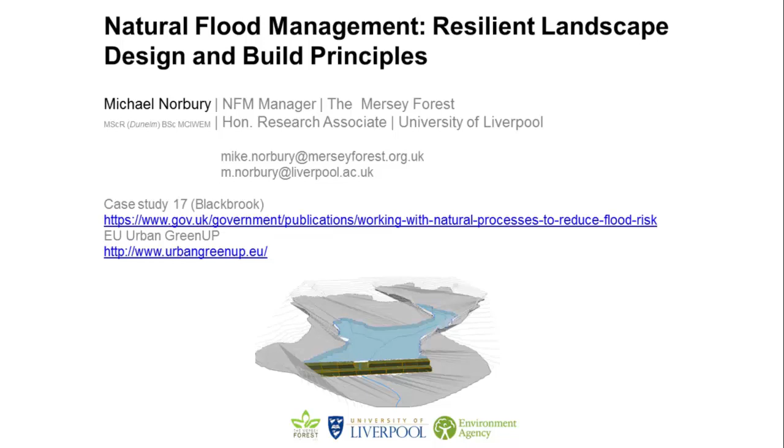Ultimately, we can't turn back the clock and abandon agricultural land and let it turn back to nature, because there's a food agenda and other agendas of a demand for housing. So it's about green infrastructure and designing attenuation into our landscape. And this is what we've been doing up in St Helens. We've been working with the Environment Agency and others, and we've built over 1 kilometre of leaky barrier over about 11 different features to slow the flow of floodwaters upstream.

For instance, this is just one leaky barrier in a pond upstream of a series of properties that flood a few hundred metres downstream. And we've put in a soil bund behind this in the next few weeks. And the idea is it just gives a bit more freeboard and a bit more storage to help those properties downstream, which, in the last event in 2015, flooded internally.

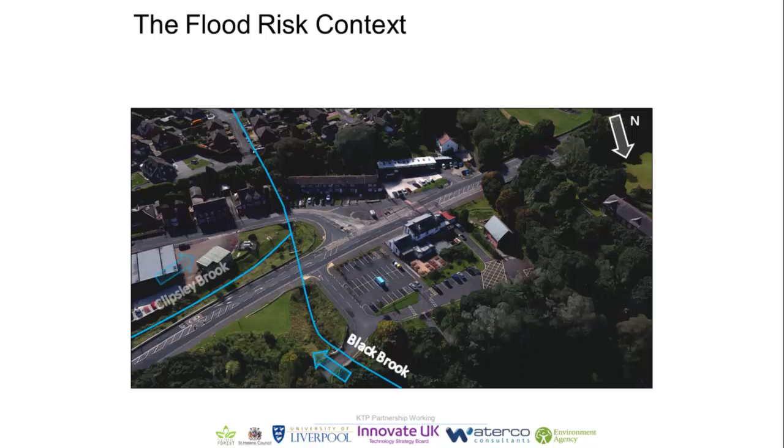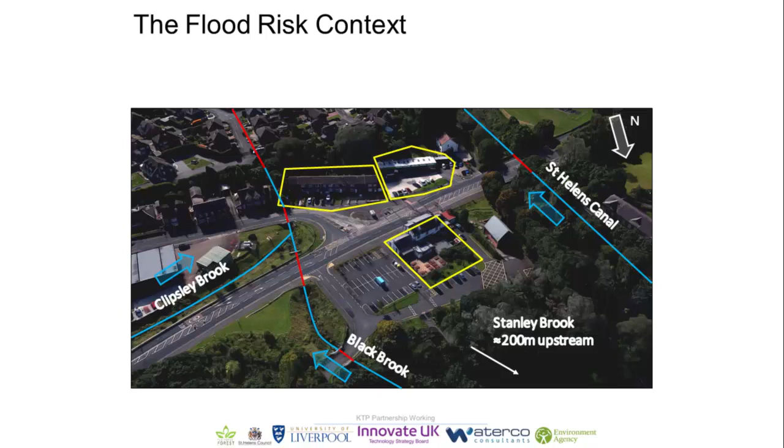So the first example is urban fringe or rural natural flood management in an area called St Helens. This is the area in question. So it's Black Brook. Black Brook is at the outlet of that 24 kilometre squared catchment, and it's at the confluence of a series of 3 rapid response catchments, which are very flashy, with that rainfall coming down to run off very quickly. And the red areas there show where those water courses are in pipes, undersized pipes or undersized bridges, which means in a high flow, high water level or flow volume, it can't actually pass through that system and out, and floods this area.

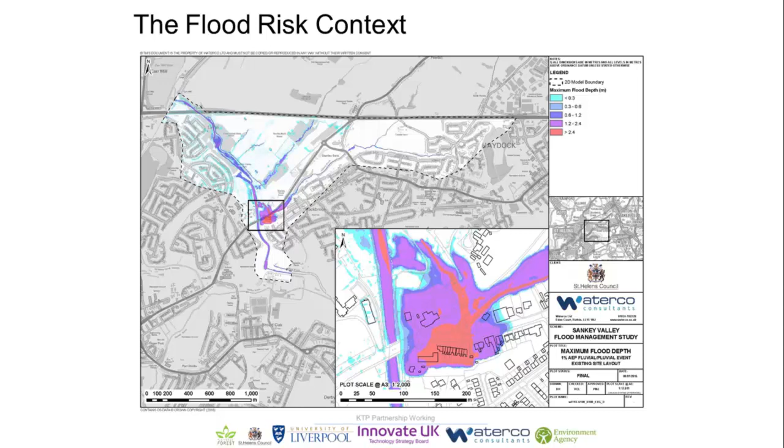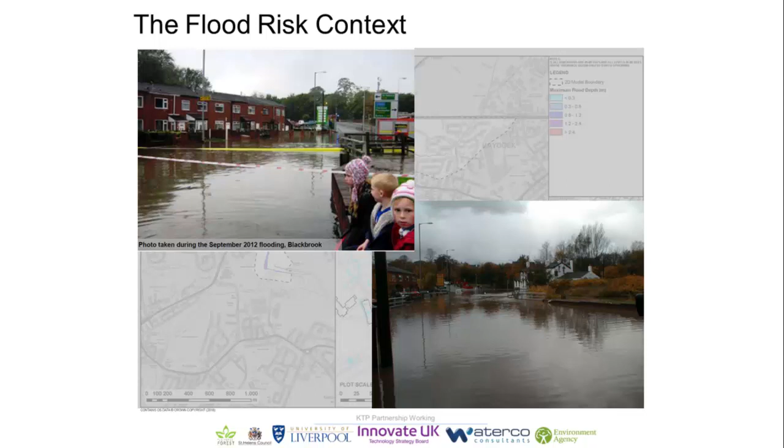So we've done some hydraulic modelling of that, and these are the depths of water for a 1 in 100 year event. Quite scary, around 2.4 metres of water. What happened in Cumbria had an initial estimated return period of 1 in 800 years, just to put that in modern day context. So those are those properties here. That's what it actually looks like when it goes under. It's happened 3 times since 2000, last event on Boxing Day.

So natural flood management is all about what we could do to hold up that water in the landscape. So as part of that, we needed to understand just how much water we need to hold upstream so it just won't flood Black Brook downstream. And hydraulic models can be used and manipulated to see how much water spills out. So in that 1 in 100 year event, 250,000 cubic metres of water spill out into the floodplain. To give some context to that, that looks like 100 Olympic swimming pools full to crest of water. And by holding that upstream, the river's still flowing, but it gives the pipes and the bridges a chance to pass that flow through.

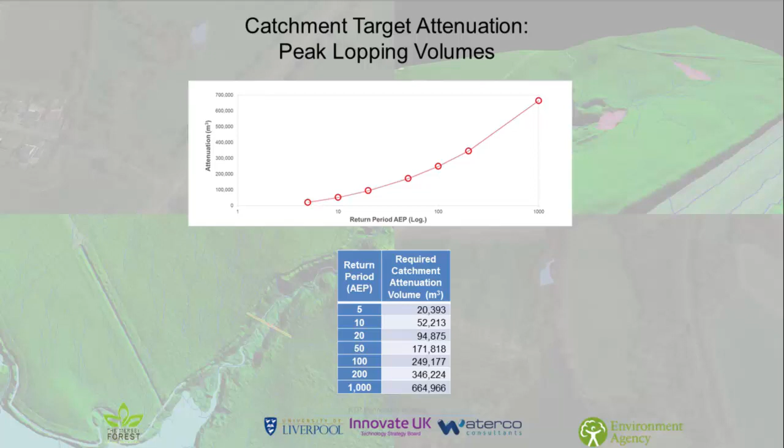And so we've been building these leaky barriers upstream, 11 of them as I've described. This is just one of them. It's an engineered log jam. The stream ordinarily flows through here, but in a high flow, the water's forced onto the floodplain and across. And basically, 4 of those features together in one location hold back 2,500 cubic metres of water. So that's about 1 Olympic swimming pool. So there's 99 more Olympic swimming pools to attenuate, or in other words, 400 more of those are required in the catchment, or similar types of attenuation, perhaps by different methods, to take that risk away.

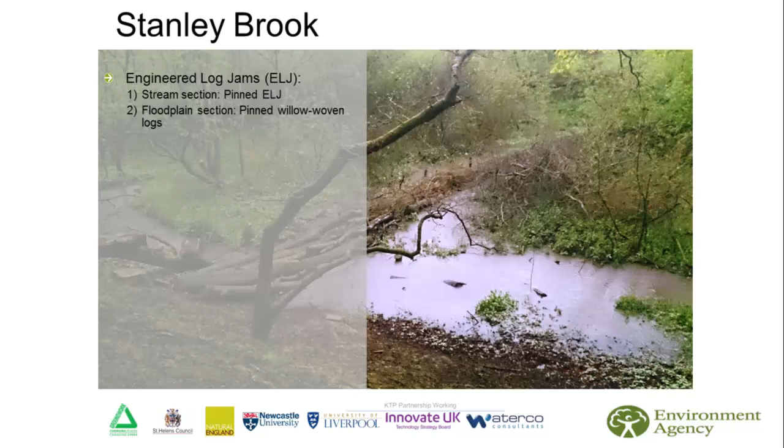But since installation, we discovered some other things about these features. So we set up a series of monitoring points from inflowing to outflowing waters. That's Dam 2, which is in the picture back here, the photograph taken pointing this way. And this is a depth of water for a 1 in 20 year event. And from the inflowing to outflowing waters, phosphate, which is implicated in eutrophication and water quality decline, comes in at about 4 milligrams per litre and goes out at about 0.5 milligrams per litre. So that's a 90% reduction on phosphate.

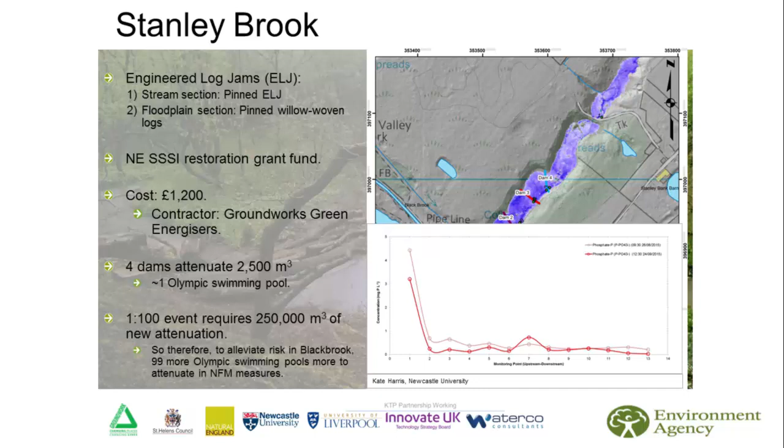In normal clean salmon rivers, you'd see 1 milligram per litre of phosphate or less, just to put that in context. So it's very dirty, enriched water. Again, nitrate shows reduction too. And we've had a PhD student study that site. They've discovered that by 2035, over those 4 dams, a third will be full of sediments.

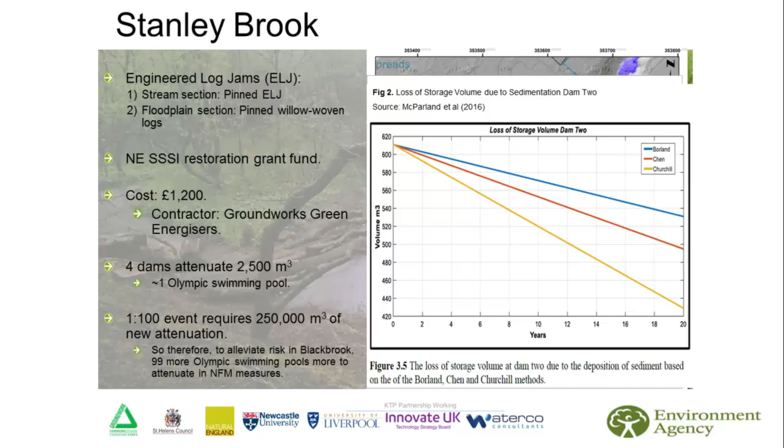That sediment held upstream, not at the pinch points like the bridges and the culverts, giving them still more capacity to maintain clear flow through.

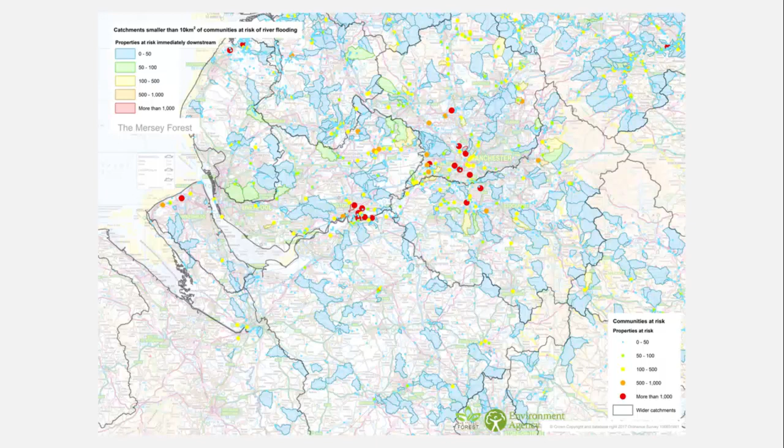So we're doing that in St Helens over here, but across the northwest, there are thousands upon thousands of properties at flood risk, indicated by these points here. And there's lots of small catchments upstream which would be suitable for these natural flood management interventions, potentially combined with harder types of engineering measures such as defence walls and flood alleviation schemes.

Green Alliance, a bunch of economists, went to look at the Sankey Valley scheme and assessed what the cost for water companies is when they have to remove contaminants conventionally, or when a section of road gets eaten away by a river, what the cost is. So that's a business as usual approach.

They looked at the business as usual approach, and then they looked at the attenuation scheme in St Helens, the Sankey scheme, and said, if we implemented this, how much would it cost? And they compared the two figures, and the NFM's 11.2 million less in a hypothetical example.

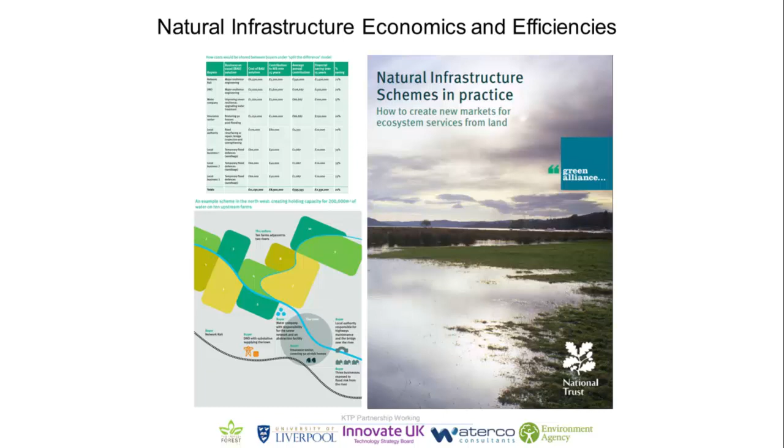So there's efficiency savings there to be made, and there's also the capability to introduce the private sector to those sorts of schemes. There's large industrial facilities within the Sankey catchment, including the likes of Pilkington and others who make the flat glass. So we talked briefly there about the rural situation.

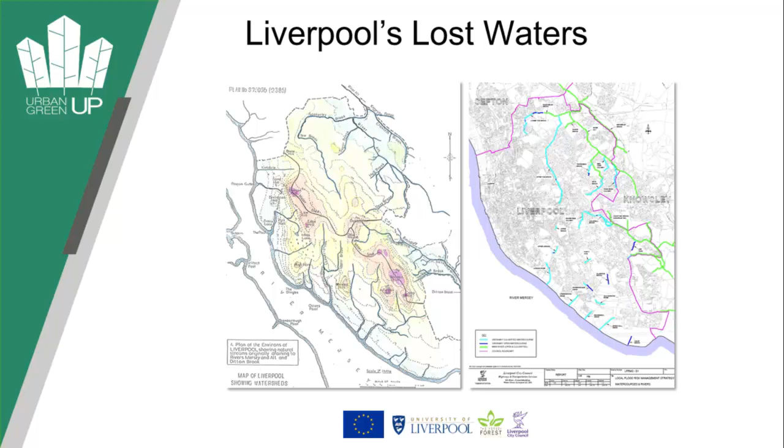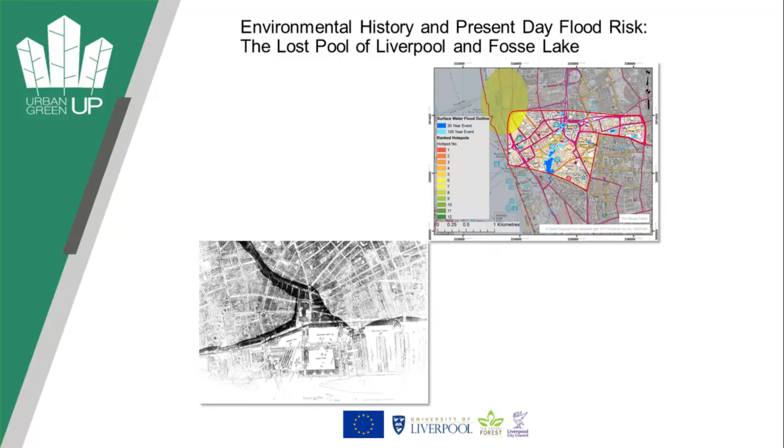And this is the old estuary of Liverpool and the reclaimed land for the docks, which was part of the industrial growth of that area. But accordingly, it now has created more risk.

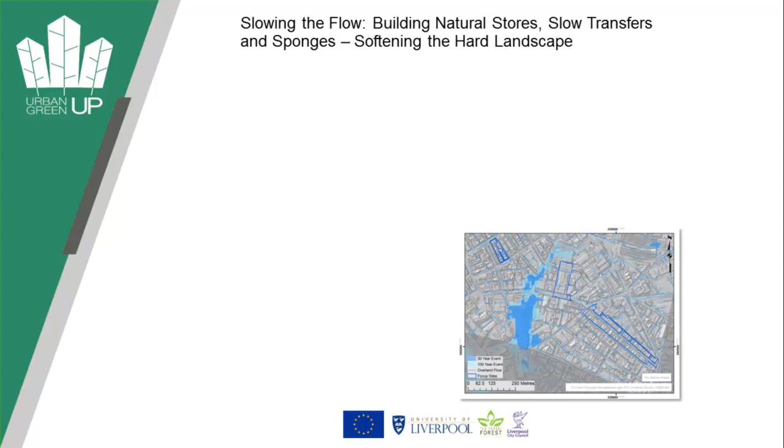So as part of the 3.2 million European Union funded Urban Green Up project, we're setting about planting 100 trees through Liverpool. And the aim of that is basically to take out these overland flow pathways to slow, store, disconnect and filter the runoff to alleviate the risk downstream. It's not to say that it's going to remove a risk, but it might make the 1 hour storm a 3 hour storm and slightly less violent.

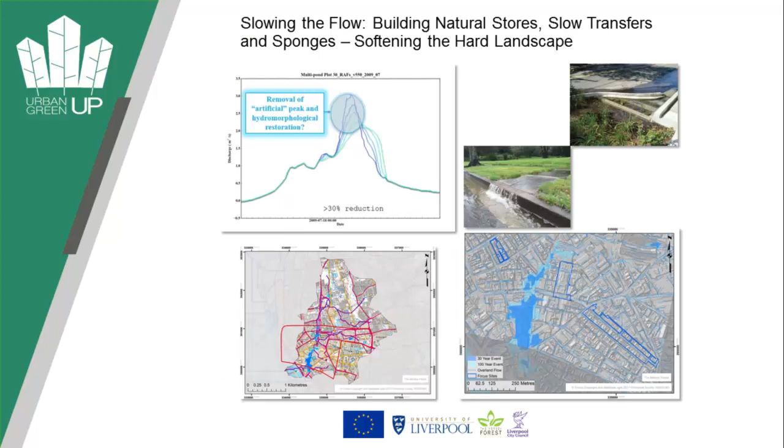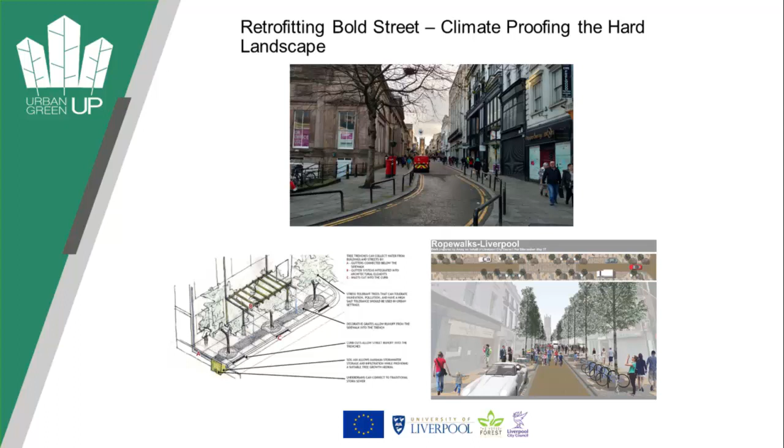So with that runoff going into the soil, the tree intercepting the rainfall as it comes down and actually pumping it back up into the atmosphere. In a perfect world, we could put attenuation in there, but there's just simply not the space. We can't dig up stuff that already exists in the urban landscape.

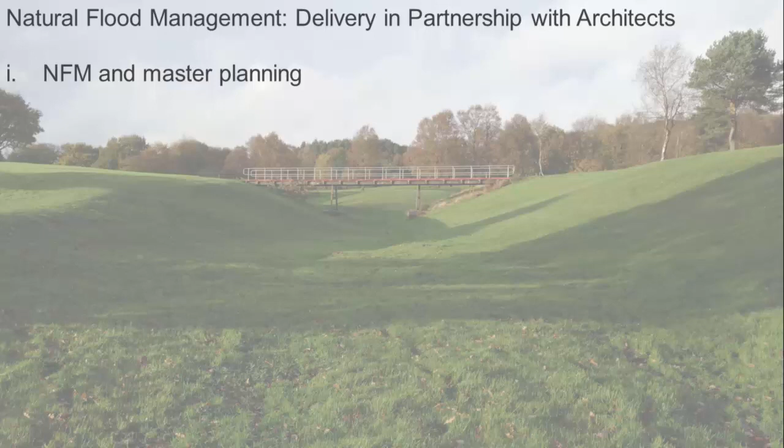This is a photo from a site in Bolton where a series of 18 properties have flooded 3 times to significant depths. When we walked the 4 kilometre square catchment, most of it was in pipes, including this location, which is a golf course. So these old rivers do exist, and we can recover them in certain locations and give that landscape its natural capacity back. But we need to design and build that, and architects can be part of that in the NFM and master planning stages.

So one key fundamental change which may be coming down the road is the National Planning Policy Framework. There's a consultation out at the moment, and rather than 'where possible', which exists at the present time, it's going to potentially move to net gain. So how do you go beyond greenfield runoff rate retention in your development scenario?

And that begs a question of saying, actually, if you're demanded to get a lot of units on a plot, and the plot isn't always the best location for holding up that water, then why not go into the rural areas to do natural flood management attenuation, and also the cost of that attenuation may be much cheaper. So some of the measures I've just showed you there, around £9 per cubic metre, whereas if you're going to hide your water underground in a detention tank, you might be looking at £50, so potentially quite expensive.

And there's also potential yield for the developer too, because a great deal of evidence shows that if your development site is surrounded by good blue-green infrastructure, you can get higher property market values, around 20% in one study. So it makes economic sense as well as environmental sense more often than not.

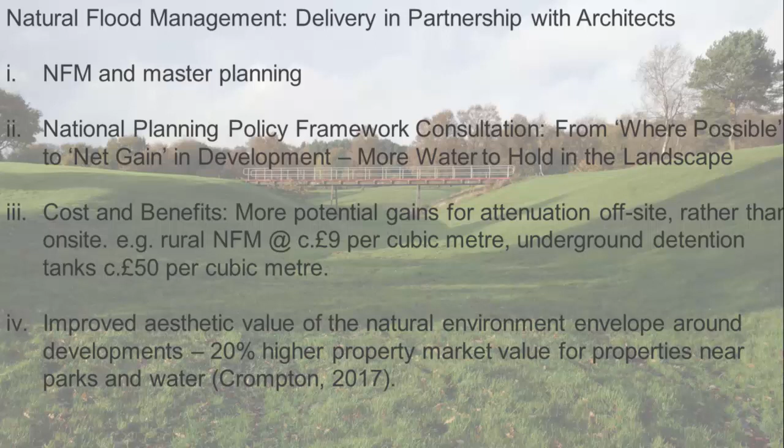So that's just a quick whistle-stop tour from me, and I'll